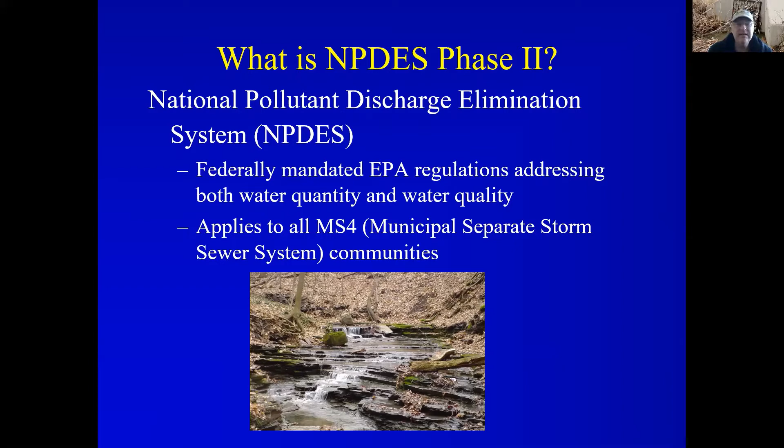So taking a look at this, again, I've included this in all the presentations, because the idea of an MS4 kind of varies when you're talking about different MCMs. When we look at the outreach aspect of the requirements, that really entails your entire MS4 boundary. We're trying to reach the population that you can reach within your realm. If we're looking at IDDE, illicit discharge detection and elimination, that's really about what discharges to the facilities that you own and operate, that you need to be able to control the pollutants that enter that. So in that respect, we might be looking at catch basins and roadside ditches or stormwater ponds.

When we look at an MS4, if this were a discharging system in your MS4, construction might have a different requirement there. You would be required to be looking at that if that were in your MS4. So it's not always clear cut, just a good visual reminder of what we're talking about. And good housekeeping, this is about your municipal program and how you are perceived in your community. So anytime you're working within your community, you are basically in your MS4, and these things apply to your discharges. So be aware of that, regardless of the work you're doing within your community.

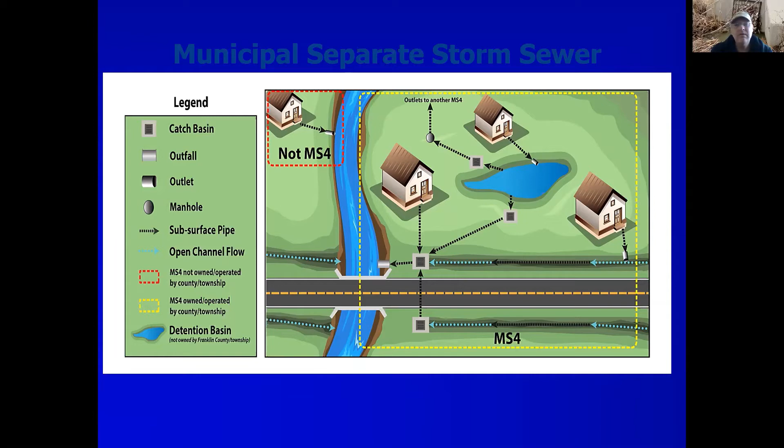So I talk about the program in your community. This is really what we're talking about. It's called your SWMP, Stormwater Management Program. Every community, every MS4 should have a program and a plan in place that really defines the who, what, when, and where your BMPs will be applied. So what best management practices will be implemented.

When we're talking good housekeeping, this may be your salt application. How do you know, what do you do every year for salt application? This may be about fertilizer usage. You have people on staff that are trained for fertilizer. You apply buffer zones to your water management areas, things of that nature. Do you have a leaf program, or do you do street sweeping? Those are the best management practices that would be applied to a good housekeeping MCM.

When will they be implemented? This is important, like I say, with street sweeping. You may need to look at your street sweeping schedule. In fact, one of the things we'll look at later is some of the performance standards for when these BMPs are implemented. Having that time frame, when is the best time to do this? Obviously, if you're collecting leaves, summertime isn't a good time to be doing that. That needs to be done during fall. So that's an obvious given like that.

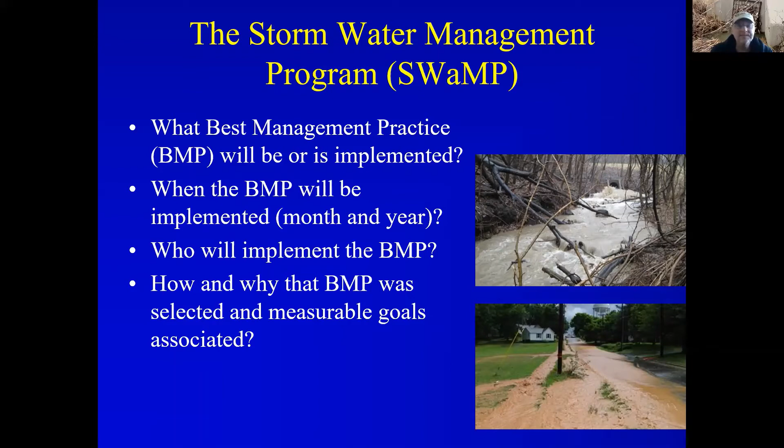How and why the BMP was selected, that's basically the rationale that you use. Looking for that, why have you picked that? And this is becoming more important with the application of the TMDLs, which is coming up in the new draft permit. And we'll talk a little bit about that. But like I say, new draft permit, if you look up here, we're working on an old permit. This one expired 2019. The new draft is out in draft form and should be coming to us any day now.

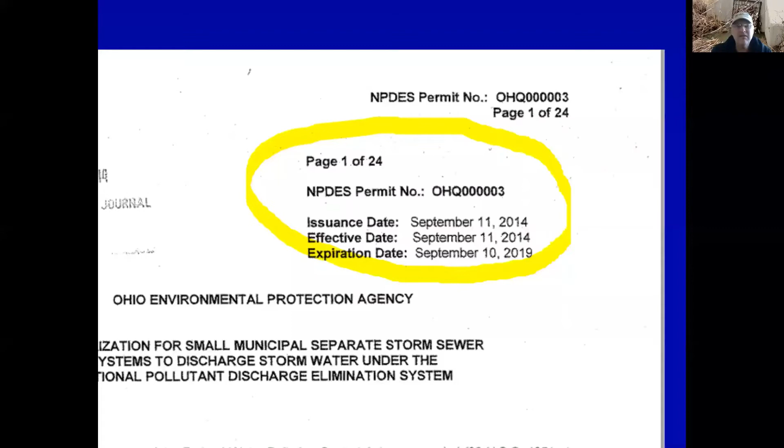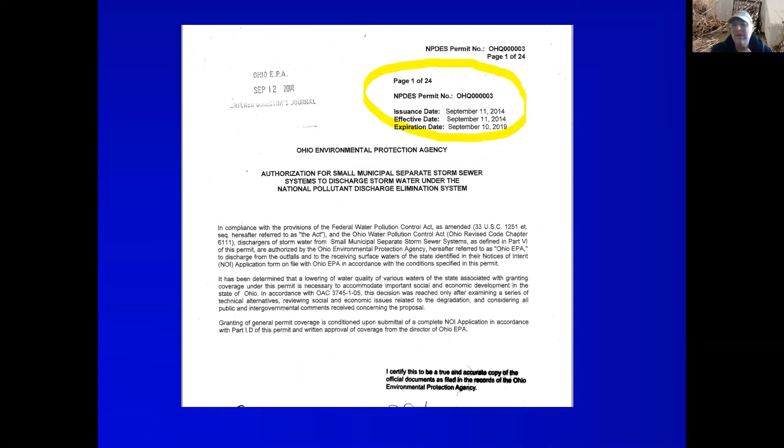I would expect to see that any time soon here. End of October was the projected date, but I think with COVID, we're seeing just a delay in most things anyway. So some of the changes that are occurring in this draft: there's a lot of clarifications, making the minimum control measures clear, specific, and measurable, adding specific actions for watersheds that have TMDLs, and addressing commonly found compliance problems. That's what EPA is telling us is in that draft. That's pretty much what it looks like.

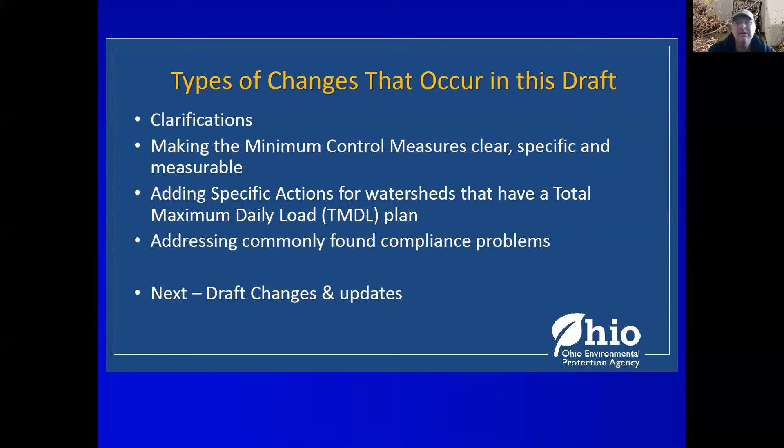And again, I'm going to rely pretty heavily on that red line draft and have some visuals of that coming up to talk to specifically. So the NPDES permit, what's it mean? It's based on these 6 minimum control measures. And what really makes up your stormwater management program is public education, public involvement, illicit discharge detection and elimination, construction site, post-construction site management, and of course the good housekeeping, which we're focusing on here today.

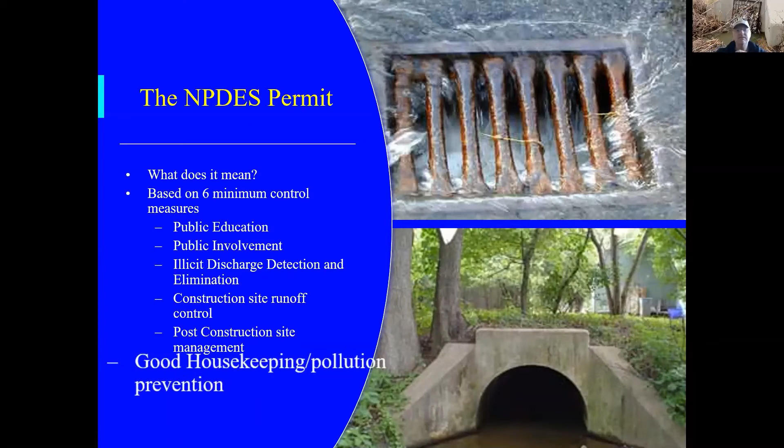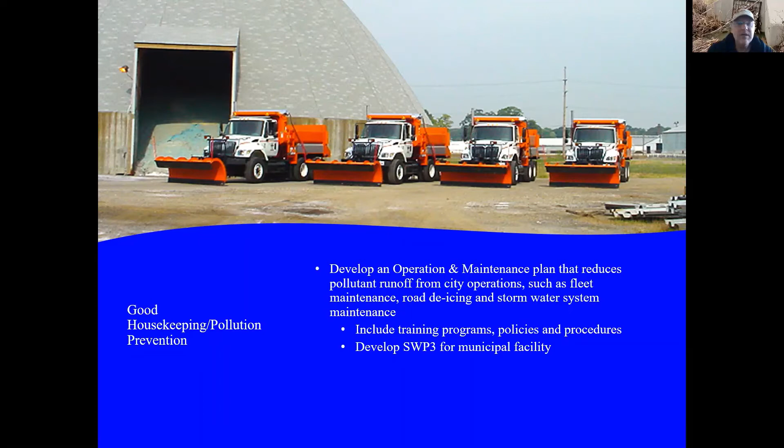So this kind of is my opportunity to update my training. The basic scope of the good housekeeping is develop an operation and maintenance plan that reduces pollutant runoff from city operations, such as fleet maintenance, road de-icing, stormwater system maintenance, include training programs, policies, procedures, and develop SWP3 for municipal facilities. That was pretty basic. It's been there for a while.

Here's the draft language. And again, you see some minor clarifications in red. Not much changes to the preamble as it comes in with the pollution prevention, good housekeeping. Developing that O&M program includes a training component. Use training materials available from OEPA. And that shall include employee training to prevent and reduce stormwater pollution from activities such as park operation, open space maintenance, fleet and building maintenance, new construction, land disturbance, stormwater system maintenance. Welcome to the training. We're covering part of that right now. That's why we do this, to meet some of these goals.

Now, I highlighted that last paragraph there. It's been in the permit, but I did want to point it out for your municipal facilities that conduct activities described in 40 CFR. So this is where we get into the aspect of treating your municipal facility as though it were an industrial site. For a long time, municipal facilities have been somewhat exempt from any of the management aspects, and OEPA has wanted us to be a little more cognizant of the fact that this is what industrial sites have to do. You need to treat your site as though it were an industrial site, even though it's really not permitted under the industrial permit. So what does that mean exactly?

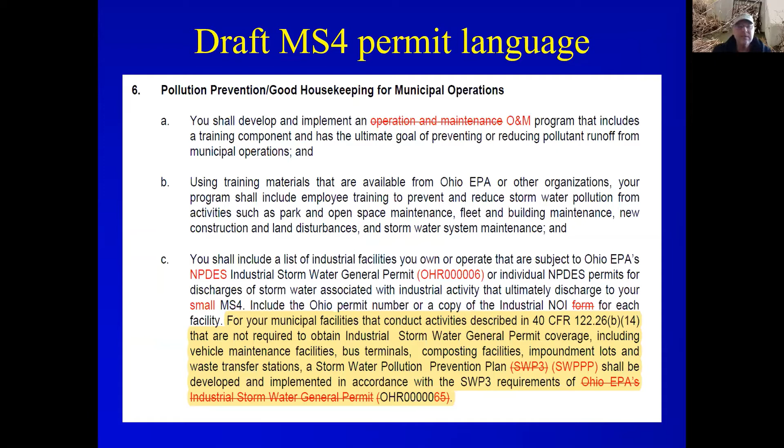We're looking at developing that SWP3, and it shall be developed and implemented in accordance with the SWP3 requirements of that industrial permit. So what I've done here is, I apologize for this slide, it's very heavy. I just cut and pasted it out of that industrial permit. And understand, this industrial permit is the multi-sector permit that covers all of the other industrial activities that you may have a specific permit for, whether it's an asphalt batch plant or a concrete plant. Those things have specific requirements in them. A lot of those, depending on that SIC code, may have monitoring requirements that are up to monthly. So there's very specific conditions for a lot of these.

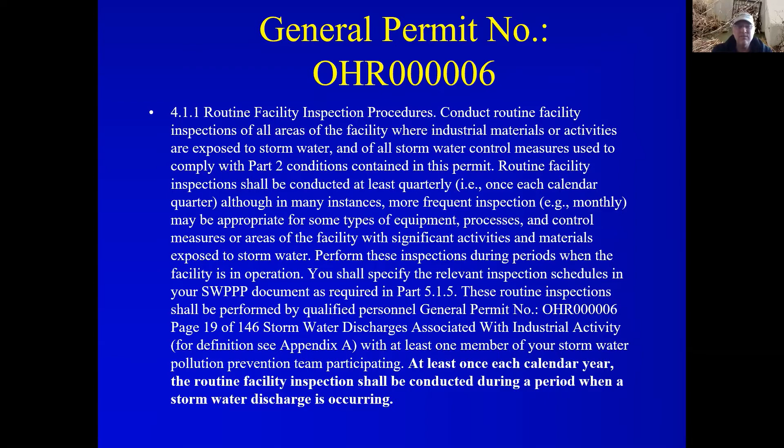But again, this is the preamble for the general permit, and this is something that applies to all facilities in that routine facility inspection procedure. And at the very bottom there, I've highlighted that at least once each calendar year, the routine facility inspection shall be conducted during a period when the stormwater discharge is occurring. So something for your facilities. And again, up here, they're also saying these routine facility inspections should be conducted at least quarterly. So you should be looking at your facility quarterly and documenting an inspection relative to what is going on at your site.

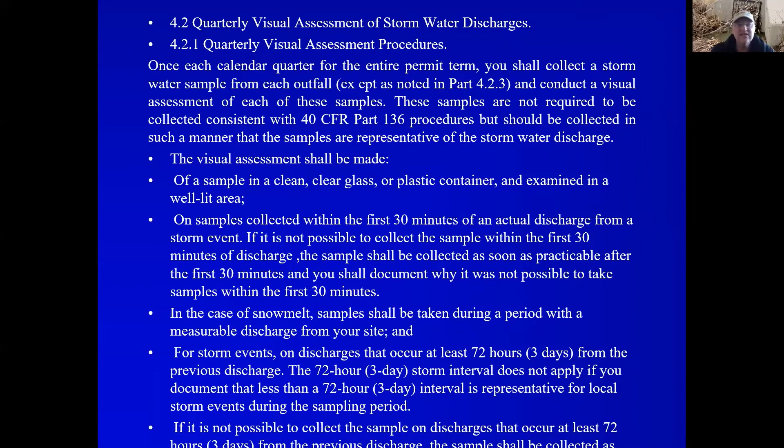This quarterly visual site assessment for stormwater discharges, again, very wordy, but the aspect of this is that you're taking this visual assessment during a period of acceptable storm practices. So, it's simply how you go about doing this. But then I want to get to this last part. You should visually inspect samples for the following water quality characteristics: odor, clarity, floating solids, settled solids, suspended solids. You're really doing a visual inspection of a grab sample. And with that other requirement, one of these quarterly inspections happens during a discharge.

Well, I read this as the minimum requirement then is you're doing quarterly inspections of your facility and documenting those. During one of those inspections, you're taking a grab sample relative to those conditions that are in there. And I encourage you to take a look at that industrial permit, which we have attached.

And look at the parameters there. Basically, what's a qualifying storm event that's defined in there. You're basically taking a grab sample during that storm event within the first 30 minutes and looking at the sample for these water quality characteristics and recording that. That's what we're recommending for SWPPPs on facility sites right now.

Doing that, having quarterly inspections of your assets on site, having an identified outfall that you might be able to sample from. You may have multiple outfalls that you can sample from. If they're similar type outfalls, pick one of those and sample that. Doing it quarterly, I don't think that's necessary on these municipal sites. Doing it once a year, I think that is definitely worthwhile doing.

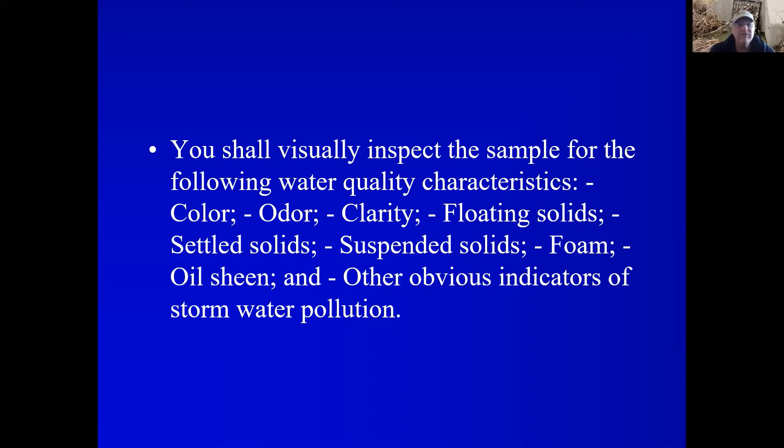So here, let's take a break for a poll question. Do you periodically inspect or monitor a facility? And I guess I will check with Brooke to see if we have any questions we need to answer, anything that comes up at this point. We'll get a poll question up there. Let's see. There we go. I think that launched it. No, currently we do not have any questions in the chat box yet.

So again, it looks like we're running about 3/4 to a quarter. I think we've got about everybody responding. So 3/4 of you are inspecting periodically. I think that's a good thing. I guess I should have asked, are you taking grab samples? I would be curious whether or not people are doing that as well.

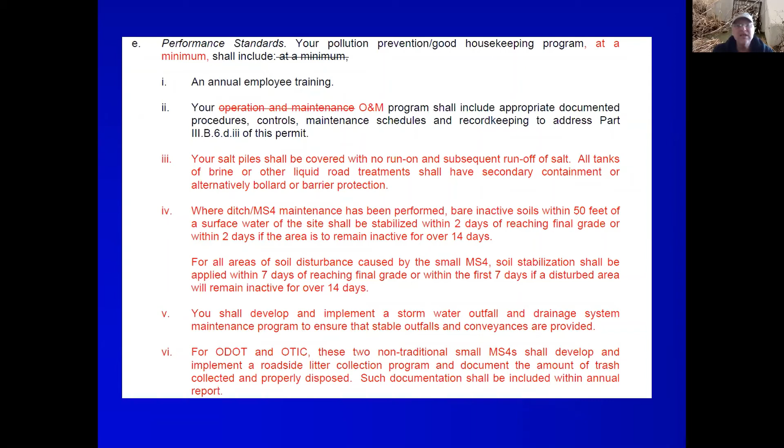This will come up with your program for looking at your outfalls in your community and mapping those MS4 locations, basically. So asset management, that's really what this is about, making sure your assets are well maintained. The last one is for non-traditional MS4s and how they can approach this. It doesn't affect us too much.

And then the TMDL performance standards, that's another big aspect with all the MCMs. They've all had these performance standards added in with this Appendix A. If your community falls within that Appendix A, take a look at what the TMDLs are and what areas in your MS4 are affected by these. The list that they've included pretty much covers the gamut of TMDL pollutants. So count on you having to perform that if you're listed in that Appendix A. And this only applies to those Appendix A areas within your small MS4.

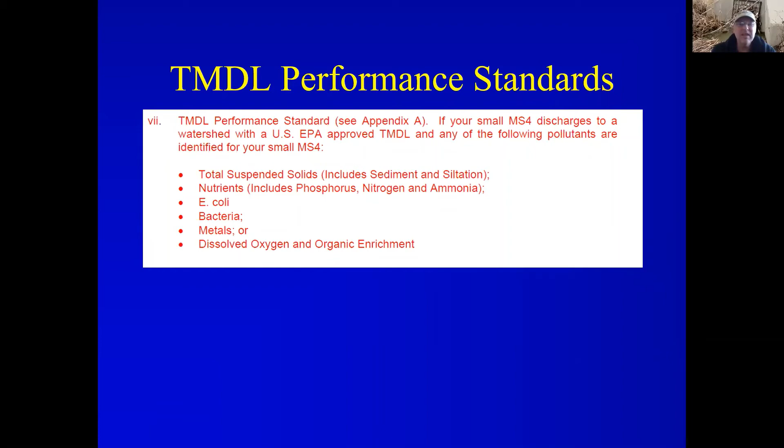But then the requirement, your pollution prevention good housekeeping program shall include at a minimum one of the following performance standards. Proactive street sweeping program with proper debris management and disposal, documenting that and prioritizing. And the crux of this, I think the specificity really comes down to that. Your program shall document debris collected in order to prioritize the areas to sweep and the lane miles swept. Sweeping shall occur on curbed streets 4 times a year.

So if your program is this, you really need to be looking at that debris collected, and if you need to prioritize other areas. If you have the same catch basin that for 2 years in a row has 0 debris collected, why are you maintaining that one? Perhaps you need to focus on one that is problematic and perform maintenance on that more than once a year. And I'm always amazed that your staff really understands where a lot of these are already. They're usually responding to complaints.

So whether your program is complaint driven, have a service request system that really focuses on when the neighbors complain about something, chances are it's causing flooding and maybe that catch basin needs to be cleaned out. If that's part of your rationale and justification for your program, be sure your stormwater management plan has that in there. That's how you approach that. But be aware of that. Look at those. It's taking your street sweeping to just another level and really looking at the data that you're collecting and prioritizing areas that need to be swept.

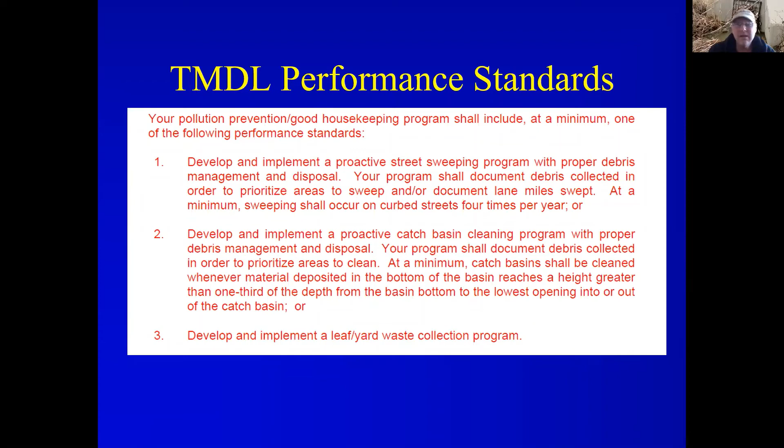So this is usually the time of year I get to meet with all you guys in person and walk through your sites. We've done a lot of walkthroughs of facilities. It's different this year. We're going to have to just rely on some pictures and talk about general issues with sites that I've seen. Hopefully this helps you out a little bit. Talk about some common issues.

Generally speaking, probably one of the biggest issues with sites is just the unkeptness of sites, let's call it. Keeping your site orderly. If you ever have an OEPA audit visit to your site, generally an unkept look will have a greater focus on things. Not having covers on containers, unidentified containers in locations, things of that nature, just keeping a clean site.

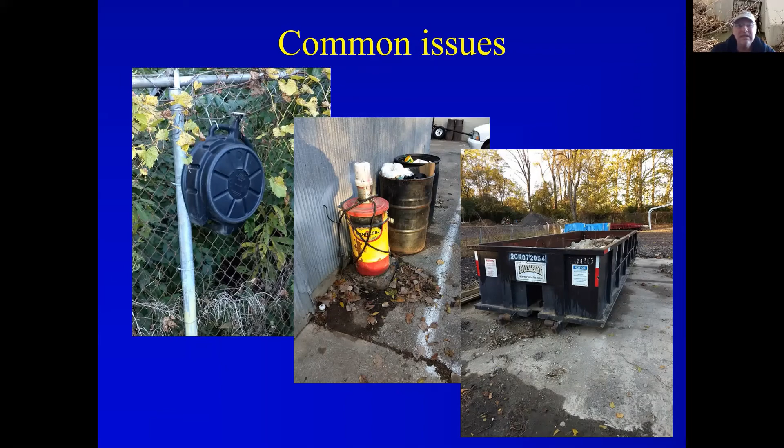Your facility is a tool for you to use. That's basically what this is. Having dirty tools, having unorganized tools, that's a difficult thing to handle and manage. So really take a look at your site, the cleanliness of it, and how can you affect that, making sure things are properly stored. And we can provide you with all sorts of input on what that means and how to do that properly. Feel free to reach out to us anytime.

Another aspect of municipal facilities is they're always kind of left with the leftover properties within the communities. So a lot of these are in floodplains, next to creeks, in low-lying areas where drainage occurs. And that's kind of a leftover legacy that we've had to deal with a lot of these municipal facilities.

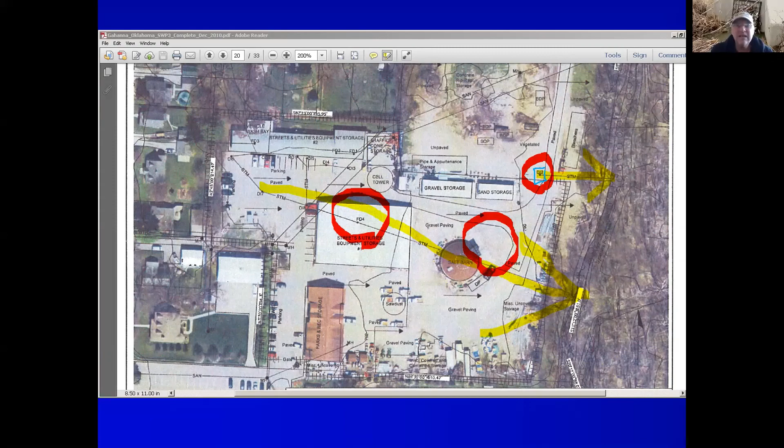The salt dome, their loading facility is located in an open area. That's fine. It's just that is floodplain in that location. So being aware of that, they actually have floodgates on the front of their salt dome, so they're not getting a flood event that is washing away salt into the environment. And then that catch basin is located for drainage that comes out of their bulk storage areas. So looking at that discharge there, those are some critical spots to look at, particularly with this site because of the situation that it's in.

Here's a storage yard where a lot of different things occur. This has a lot of off-site runoff that comes onto the site that is basically clean stormwater runoff. Why mix that with anything that you might have on the site there? So, the idea of providing perhaps silt fence around any debris piles that you put up there, maintaining that off-site flow so that it's directed to your catch basin without any mixing.

That's the kind of thing to look at when you're managing these sites and determining what's going on with your site. So that outfall, again, is very critical to this site and what happens with that. Maintaining that grassed waterway down through there, that's just an added benefit, and not disturbing that across that drainage area is of importance there.

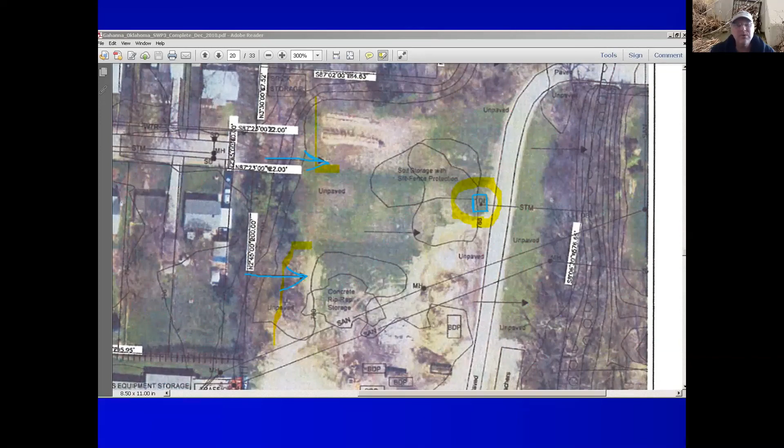We visited a lot of sites that have spill kits in barrels that they buy commercially, and I've generally asked staff if they've ever opened them and looked at them. It's like, no, we've never used it. We don't know what's in there. I suggest you take a look at what the use is of those. It's your staff that's going to be using those. Be sure they know what is in there, what it takes to apply those, and what things to use during that application. So I encourage that use and that training.